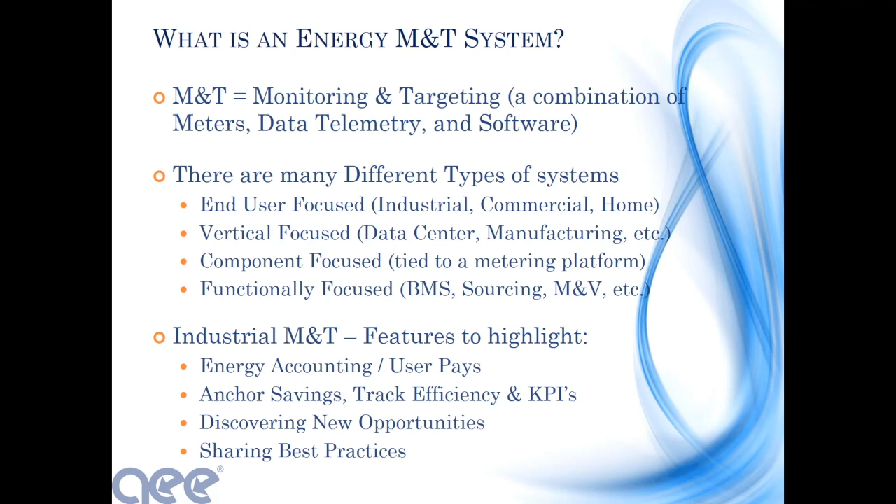So we tend to believe that things are all working right, and then you start to see some of the trend data in some of these systems, and you go, well, it's not quite what we thought. And I think some of the programs can do a lot to share best practices.

And I think we found that the way to really deal with this is to say, let's talk about the real cost of this. How deep are we going to go with metering? And I think if you compartmentalize that around different levels of value, you'll start with, well, I can just take the site and get my site data.

I'd love to then get down to a department level, and department could be your entire utilities department versus production department A, B, C, whatever. That pushes that user pay model and gets us into doing some departmental intensity tracking. And then I think a level 3 is to go down even deeper into a line or a system, so a compressed air system or a chiller plant, and then we can ultimately get down to the asset level.

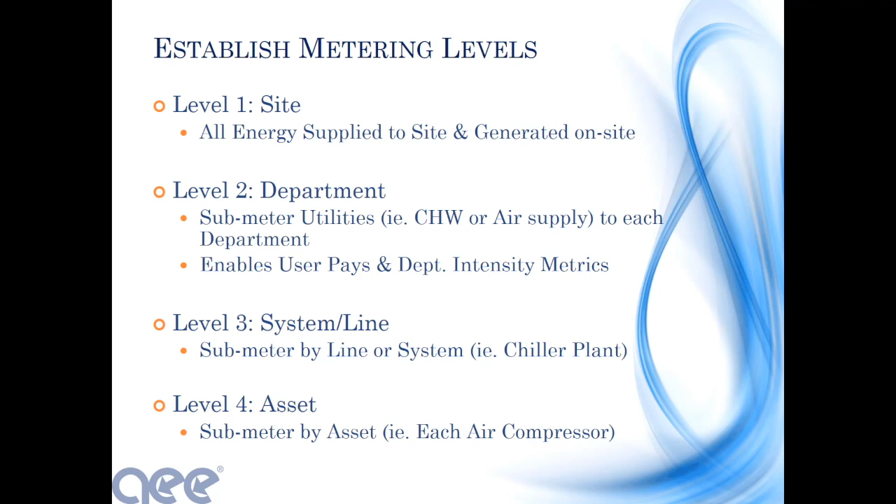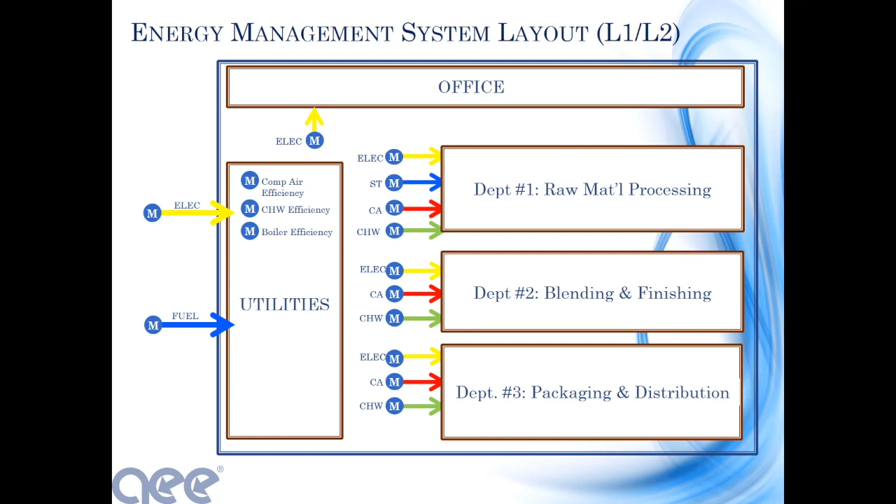And so this is kind of a silly slide, but we really moved into saying it's not just about electric. What is the compressed air cost that a department is consuming? And let's put that tariff into the M&T system, and let's just make that part of their accounting.

And so here's an example of some type of a pharmaceutical supplies plant. They have a dialysis department, so I think I know where this one is. You did the job.

This breakdown is then really just showing you that now we know who's consuming each utility and by what. And I know some of the stuff is hard to see up here, but I think there's chilled water and compressed air and electric usage. And so the site has moved this into not just, okay, now we know who's using what, now it's into their budget.

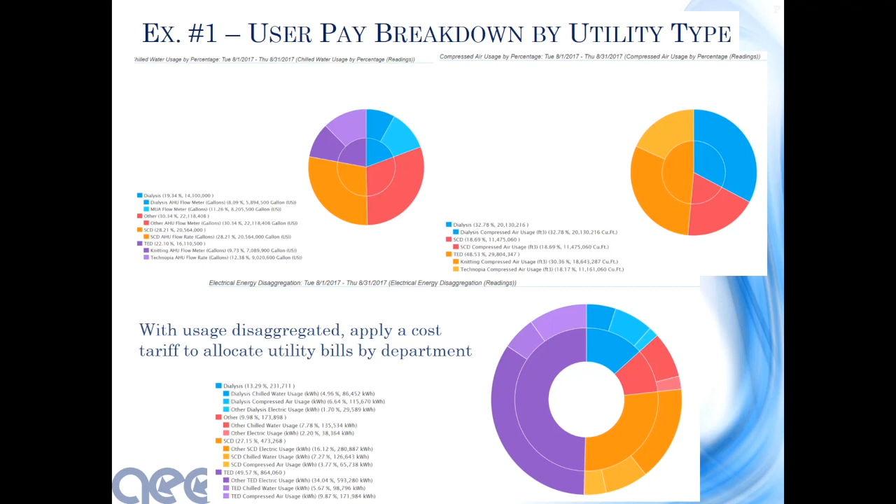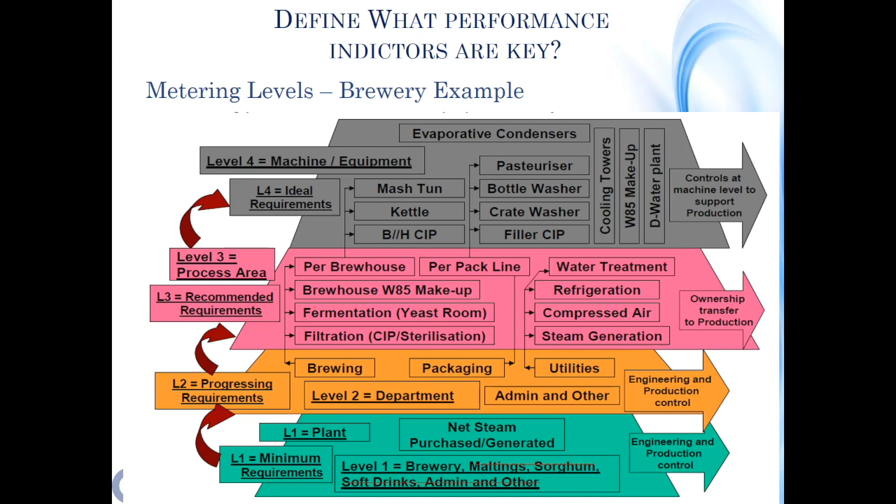A brewery company that we've worked with kind of did the same thing, and this leveling has built up into, well, we've got to start by really trying to get to this level 2 so that they could do their user pay cost accounting. But within each group then, it kind of led to a stacking of how deep they wanted to go. So the utilities guys obviously wanted to start looking at systems, and the brewing department wanted to start moving into the different process areas and ultimately into the assets.

This has then led to, well, if we go deeper, what is it that we're going to track and do? And so it's kind of turned into, and this is still what the brewery guys, let's just talk about the major energy consuming systems or process areas, and let's talk about the data that if we could start tracking, what would we be looking at? What would be our short interval control metrics that we're going to watch for?

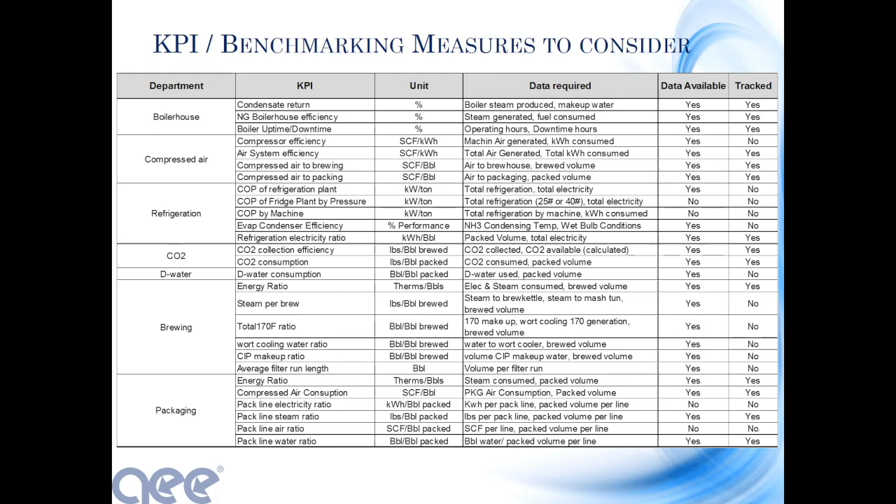And so that's led to somewhat of a playbook for the organization to go through and say, well, do we have this data, or are we tracking it today? If not, then that leads into the scoping, with the objective being really to try to track these KPIs. So let's get into some examples. There's some stories here really more about post putting in an M&T system.

So let me start with a little 2 megawatt trigen plant that was built in 2010. O&M was taken in-house after about, I think, the first 2 or 3 years of operations. It was just more of a contract renewal decision. They decided to hire the employees. Unfortunately, as that happened and through the few years that followed, the employees knew how to keep the cogen plant running, but they were just laser focused on this system, and they really weren't connected to the rest of the facilities team. They were always an independent contractor, and they were still kind of just left on an island.

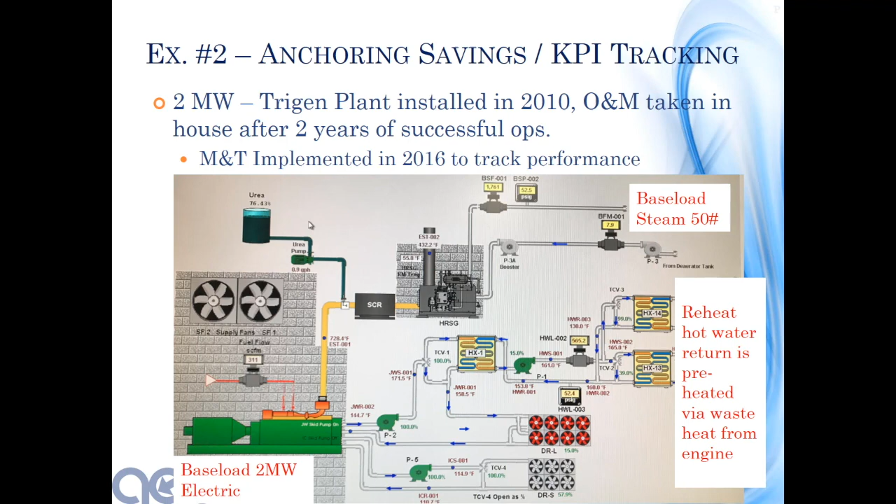Well, this system was putting baseload 50-pound steam into the building. It's putting all the reheat hot water that it can produce off the jacket hot water system into the reheat loop to offload steam being used. And there was steam being topped up by boilers on top of what the cogen brought. And of course, they're taking their electric. Well, when we came through the site, we said, there are performance issues, but why don't we start with putting an M&T system on top of this, and let's get the KPIs to make sure we know how to run this system.

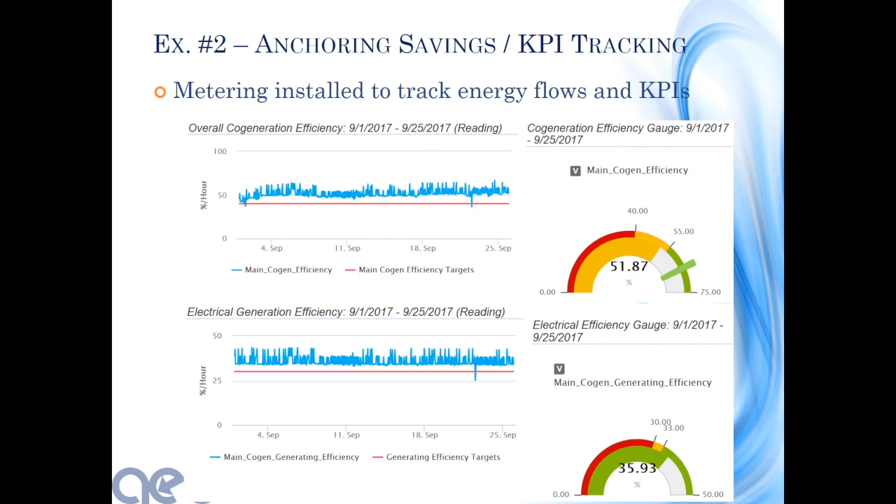So we see we've got some overall efficiency drop, but we have 3 generation sources. Electric, we seem to be in the green, and we're hitting kind of the efficiency off of that, which is, I would say, typical. But we do see that we're having some issues, and the dial on the right is more of an average over the window of the trend, okay? So we start to look at the hot water recovery, and we start looking at the steam, and we see there are some weird things happening, and there's a story behind every one of these, but I think a lot of this is just unseen and unaddressed.

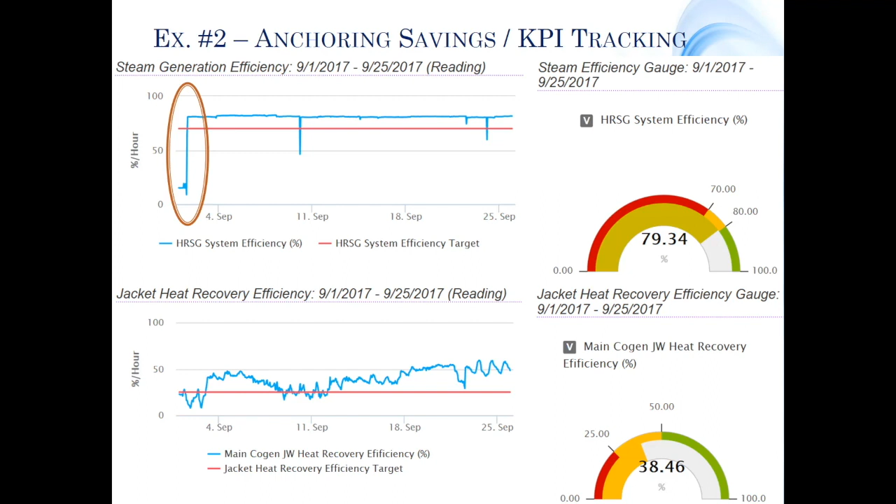This case is there's a problem, something got fixed, but do we even know why the problem occurred? And I think through that conversation of looking at this data, there's a lot of organizational intelligence that's lifted. And there's communication now happening between operators and facility guys that just wasn't really there. So this story goes into a boiler plant that was being upgraded in its controls, and the contractor set a higher pressure off the boilers when he was done starting up the new controls.

And that pressure was like 70 pounds, and the steam generator off the cogen system was putting out 64. Well, when the HRSG, the heat recovery steam generator, sees the pressure set point, it just dumps all the heat to atmosphere. So you kind of have to trick these things into forcing all the heat you can out of the system. And one little change in a good project to put new boiler controls on suddenly caused all the steam to drop off. Well, one of the boiler guys caught that, and he said, why are we running this higher pressure? We've never ran that. He fixes it, and all of a sudden it's fixed.

And I don't think that was really even known up through management. No one really was aware until we started looking at some of the data and asking the questions on what happened on that day, and then the guys start talking, and it was almost like the boiler house guys don't even know that the cogen house is having any issues at all.

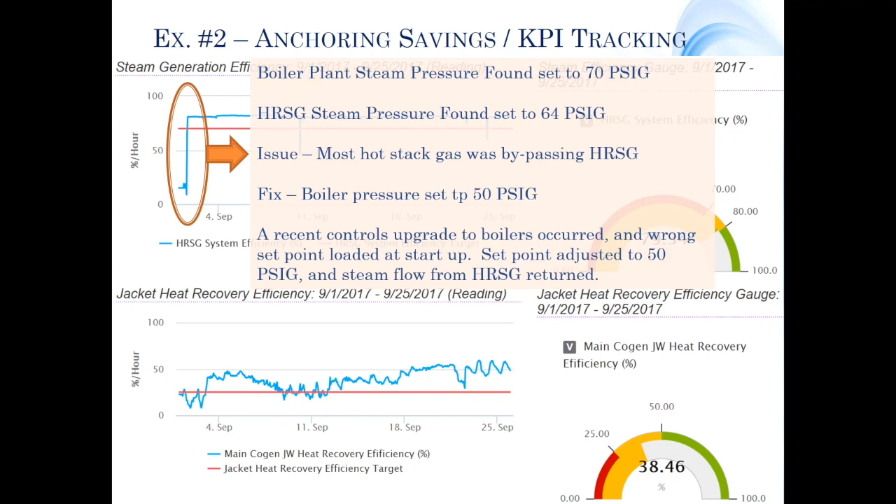They didn't know that there was a steam loss. They just knew they saw a new pressure they never saw before, so let's fix it. So that collaboration, I think, is enabled through what some of this data can do. And there's other examples in here.

You see there's kind of a lower red limit for, this is the jacket hot water recovery off of this particular system. And we know it's in the bad yellow range, and heck, it's even saying that we're looking to get 50% of the available heat as our target to hit green on our dial. That's not really great, but that's the designed, capable, connected things that can take heat, can only get about 50% of what's available. And we start seeing all the drop off, and it's the same type of integrated system headaches, but separately managed, that has caused all the waste.

So this particular story is one of a steam valve leaking on a steam heater that has taken the hot water loop up over 200 degrees. The jacket hot water temperature coming off of the cogen system is only like 180 degrees. If the heat doesn't get used off of the cogen jacket, it goes to a radiator and it's just wasted to the atmosphere.

So in this case, the situation got so bad with this leaking steam valve that at nights and when loads are high, you don't really see the problem as much, but in warmer days, this hot water temperature would just rise so hot that it would push heat back into the jacket water loop and then just to the radiator. So now we've got kind of a boiler system heating up hot water and pushing it over to a cogen heat recovery system to just reject it to atmosphere.

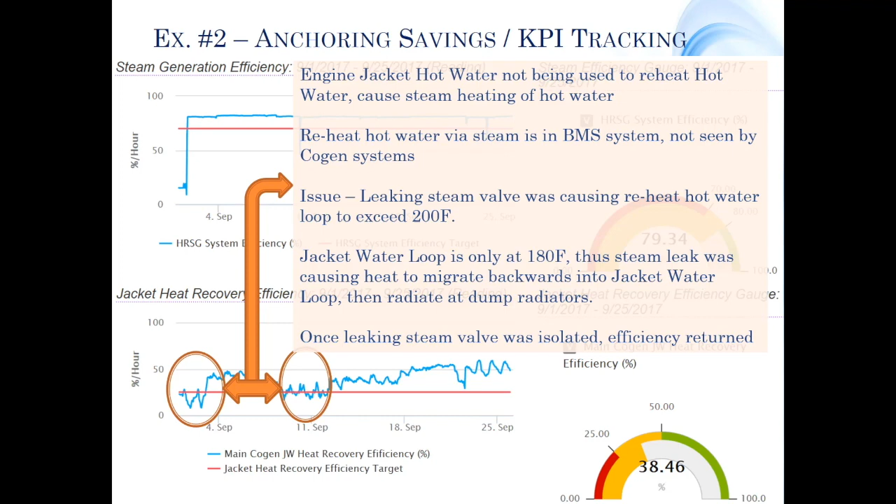So through kind of seeing all this and fixing it, you kind of see things are starting to come up. But what was interesting about getting the conversation going through the data was just how the collaboration has improved within this particular site. So I'm giving you some graphic pictorials here. That whole cogen graphic is a whole separate system in a separate part of the campus from this particular place.

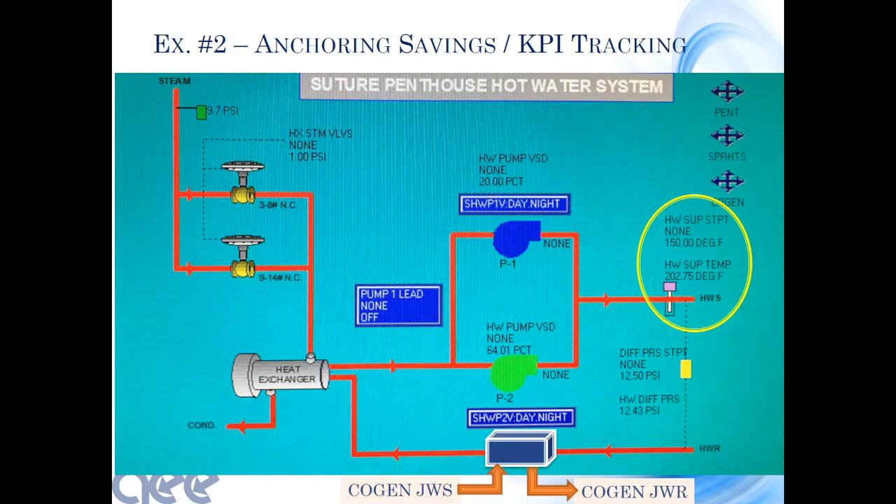And this is a heat recovery off the cogen hot water on the return to try to offload the steam. And so the leaking steam valves were just causing the temperature to kill the entire potential to recover any heat. With the M&T, though, I think you can take this to a point where now we start alarming for temperatures. You can start putting alarms on things like that.

So I have another kind of opportunity found story in another location. This is on a chiller plant where effectively the understanding was that we have a master sequence control system. It's turning on chillers, it's turning off chillers. It does all that based on load, and great, we end up putting in chiller plant power meters, some tonnage meters, so you can get to a performance metric. And sure enough, you start watching and you say, no, I don't think this is working the way you think it is. Something odd is happening here.

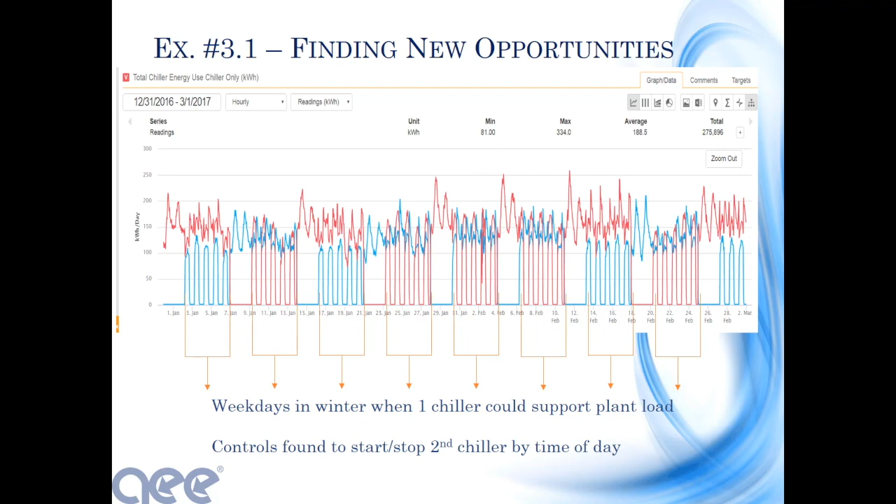Well, every morning, a second chiller comes on whether it's needed or not, and every evening it turns off. What's going on? Well, come to find out, there was a day where somebody was just complaining about temperatures. So there's a chiller plant operator that just makes it his routine. Every day he comes in, he turns the second chiller on, and every day when he leaves, he turns it off. So the controls were right, the behavior was wrong. And I don't think anyone knew he was doing it. He just felt that was the right thing to do to keep the headaches to a minimum.

And so the value in these cases too, by the way, we thought in just about every case of putting in M&T, you'd see somewhere in the 1 to 3% in savings, and just these issues that we're seeing after the fact are more than 3% of the spend in these sites, if left unaddressed, and a lot of them are.

Another sequencing control story here, but there are multiple air compressors, same type of situation. There are controls to allow things to run, but there's always operators that'll just have an issue and they'll go and put something in hand. And so this was a case where a lot of air compressors were just left in hand and operating, and the controls weren't able to do anything to turn them down.

Recognizing that was through the KPI of cubic feet per minute per kilowatt from getting the compressed air plant at this location under an M&T system. So then the investigation, from that's not the design performance that system should be doing, had led to a recommissioning of the controls, no capital, and the results of the program are then simple and easy to see, right?

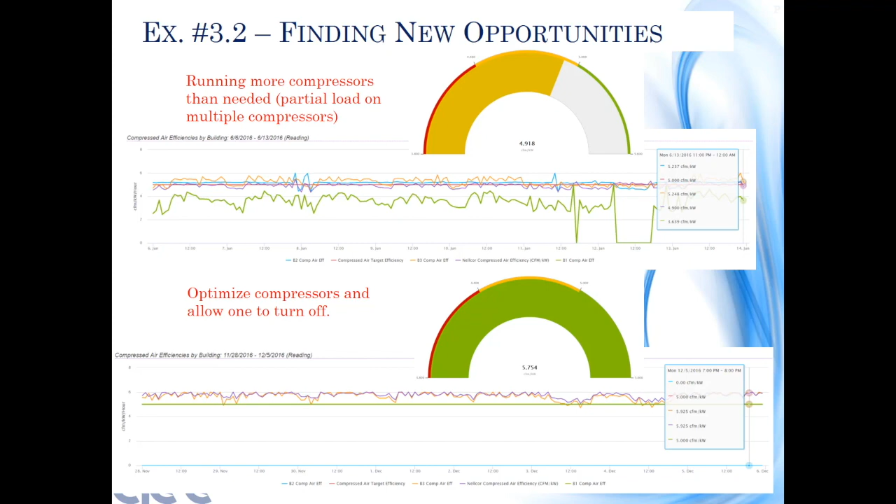So, a final example on the use of some of this information. Again, I'm not trying to sell anybody software here. They all have different capabilities, but I think some capabilities go with the particular company. If I talk to a high energy using company with multiple departments, the idea of user-pay by department makes sense. There are some manufacturing facilities where there's no clear definition of a department, so that user-pay piece maybe isn't as critical as just looking at KPIs or doing some tracking.

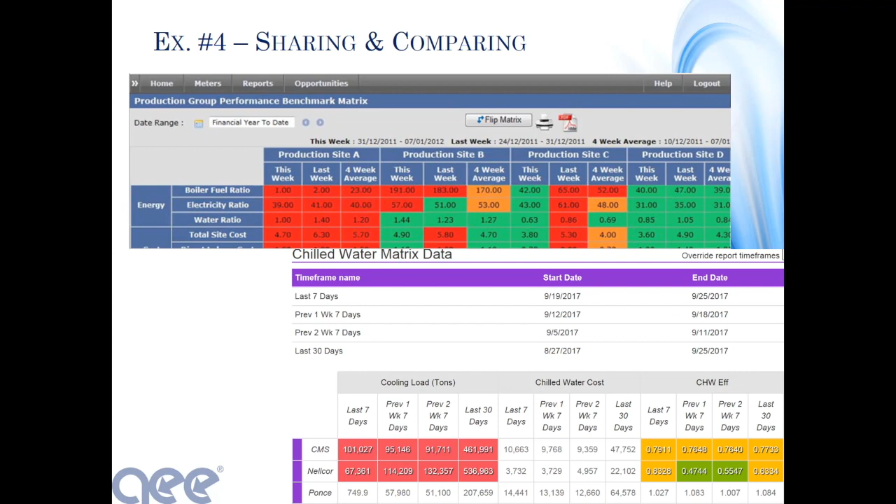And there are a few examples of taking this across multiple plants, shown here at the bottom, where you start to compare peer groups against each other, and you drive interest and focus through competition or through embarrassment, right?

So the difficulty has always been, how do you get money? I mentioned there are some DOE white papers on projects we've worked on that have allowed M&T systems to get put in. There are studies that suggest just having the metering capability and these types of tools can reduce 1 to 3% of spend.

And it's a total leap of faith to try to sell that. Whether you're internal or external, selling into a company, it doesn't matter—there's still a leap of faith everybody has to take. And we've seen 3% or more after the project. So I don't think there's as much resistance to taking that leap of faith today as there has been over the years. Ten years ago, I couldn't get past this point.

It's like, well, maybe we just put meters into the project and use them to M&V the project, as long as it doesn't kill the budget, or doesn't get value-engineered out, which it usually would. So we found that most of the work to put the M&T systems in had to be part of an M&V plan. It's somewhat changing, and that whole software selection piece—I think you get an opportunity if you're within a company that has a portfolio of operations.

And you see the bigger, broader play of trying to bring all those systems or all those plants under one system. There are definitely suboptimal software solutions for a particular plant, but if it's the corporate strategy, it allows the integration of all the data from multiple sites.

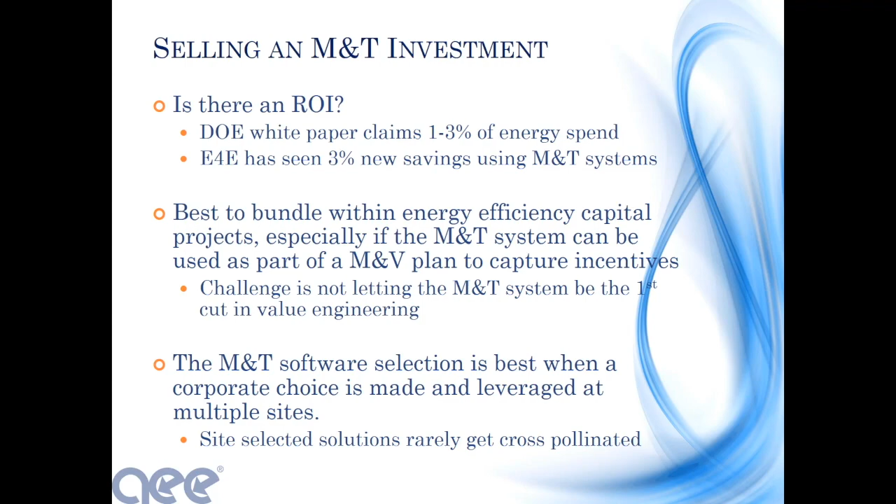So what E4E has switched into thinking and doing is: we know they have good data, and the ability to do a lot of analytics on their systems that are traditionally harder to do with just temporary data logging and that kind of thing. So let's use that information and drive value, and let's put some risk on the table to do so. That's a bit of a story of some of the interesting...